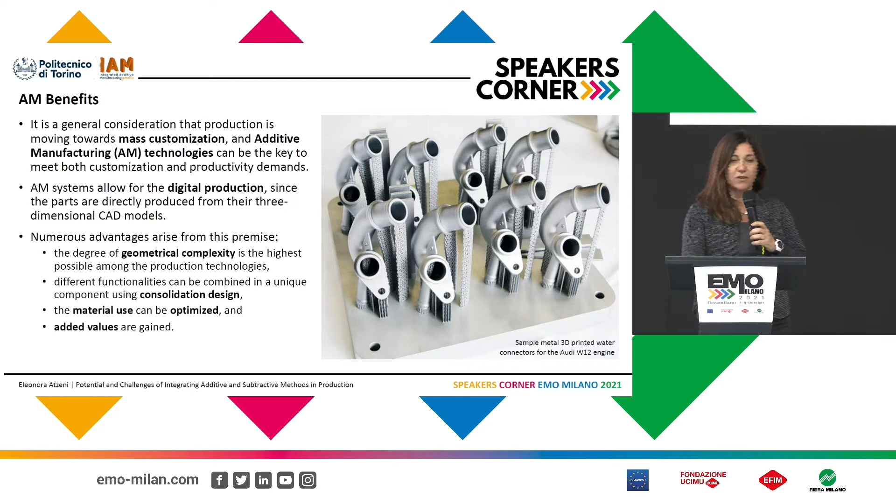So basically, additive manufacturing has gained a lot of attention by industries for the potentialities of these technologies. For instance, the possibility to create very complex parts. The possibility to increase the complexity means that we can optimize the part, reduce the weight of the component, and reach an added value on the component. That is also interesting from the economical point of view.

Additive manufacturing, as was introduced before, is a flexible technology, is a digital technology. So what you create as a three-dimensional model is produced by the machine. So we have the physical replica of your idea. And this is disruptive, and this meets the mass customization requirements, because you can change the model, you can change the part, you can build different parts on the same job. We can have a customization of components.

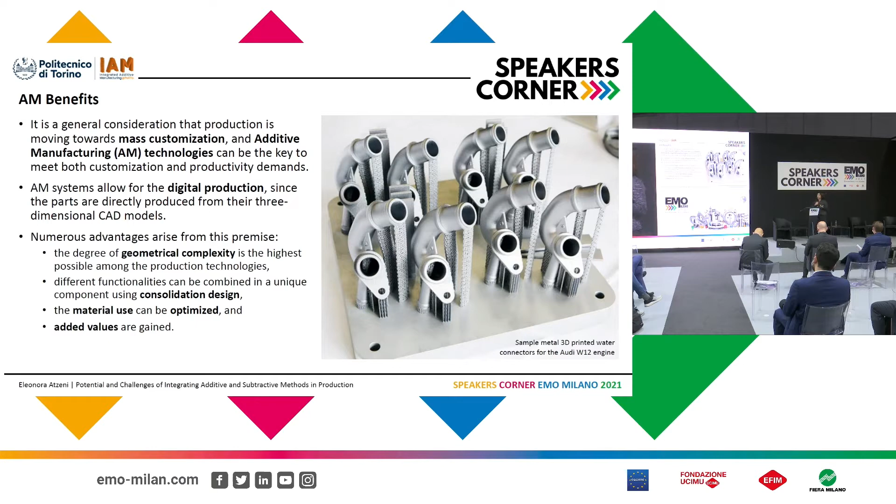We can have components with multiple functionalities in the same part, avoiding assembly of different parts. So this is the consolidation, the reduction of number of parts. And we have the added value. This is the most important characteristic of additive manufacturing components. But there are also some drawbacks.

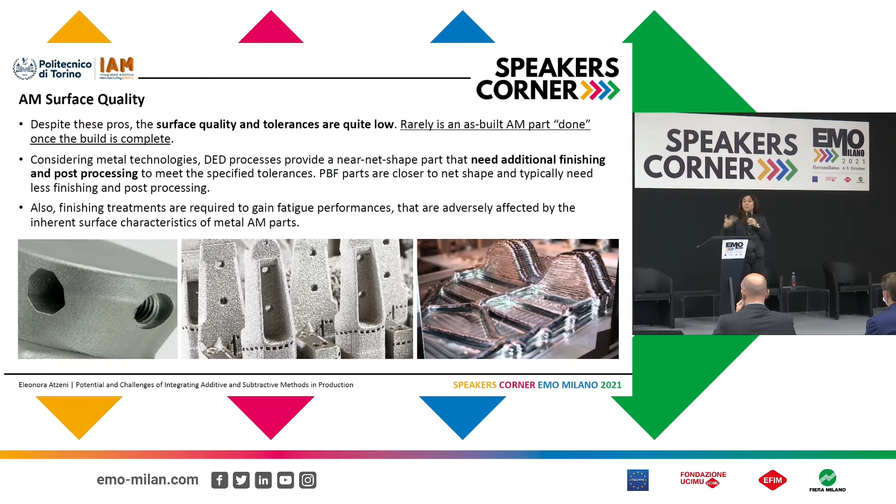And today we discuss basically the surface quality. Because when we want to combine subtractive, it is to remove material to obtain specific properties on the surface. The part is typically rough. The roughness is higher than conventional machining, especially. We can compare with casting. And the tolerances are larger than other subtractive methods.

So, to improve the aesthetic quality, tribology characteristics, or to have closer tolerances and better surface quality, we need to apply surface finishing treatments. In the picture, you can see three different metal components obtained from left to right: powder bed fusion, electron beam melting, and directed energy deposition. The differences are very evident.

Moreover, we must apply finishing processes if we want to improve the fatigue performance, because the surface roughness can be a problem. So what type of finishing technologies are available?

Basically, the same techniques used in conventional parts can be used in additive manufacturing. Considering metal parts, we can apply media blasting or shot peening to improve the quality of the surface and also obtain a compression state on the surface.

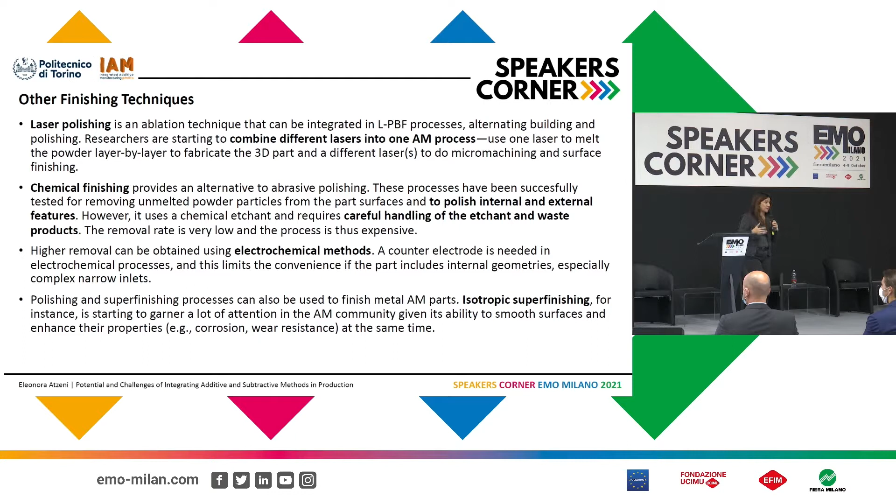That's another characteristic. But sandblasting, depending on the system, is basically performed manually by the operator. So we have a loss of uniformity in the surface treatment, and it takes a long time.

There are also mass finishing systems, mechanical, using abrasives in a tank, so the part is surrounded by these abrasives. This is faster, but again we have some problems accessing, especially internal surfaces and internal features.

For internal features, we can also use abrasive flow machining. We use a viscous liquid with abrasives inside to improve the surface of channels, for instance.

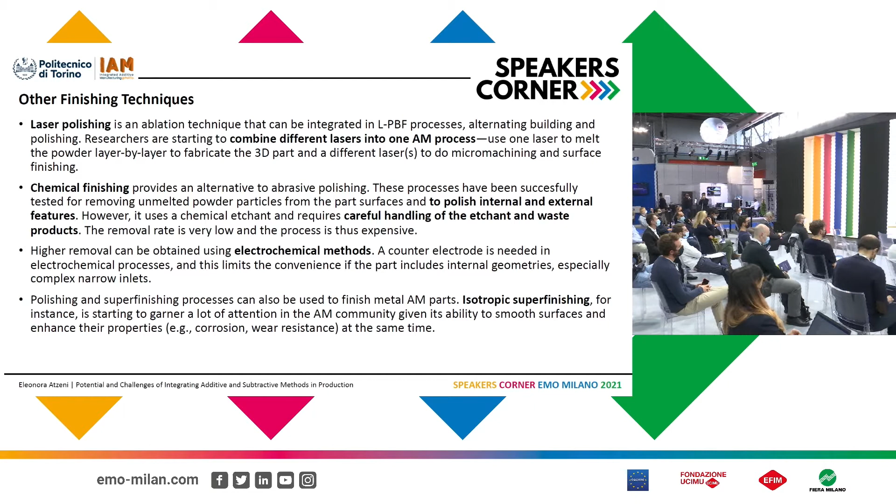Other methods are laser ablation, which is interesting for laser machines. We have a laser in the machine, and we can combine different lasers to perform building and polishing in the same machine. Some researchers are working on this topic.

And chemical finishing uses an etchant, so we have problems related to safety hazards and the sustainability of the process. Electrochemical finishing, again for internal features, uses an electrode, so there are accessibility problems. Isotropic super finishing for mass production is another interesting system.

By these technologies we can improve the aesthetic appearance and gain tribological functionality, but if we want precision, to meet close tolerances and the requirements of the design, we need subtractive methods—traditional subtractive machining.

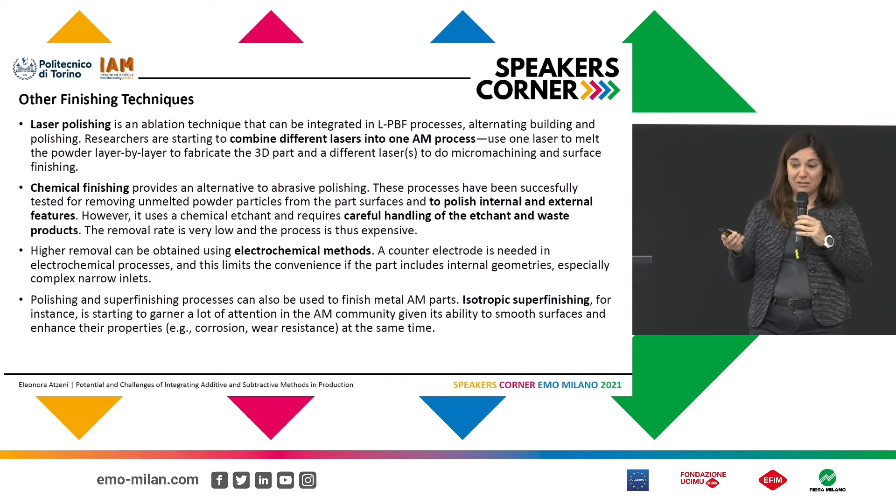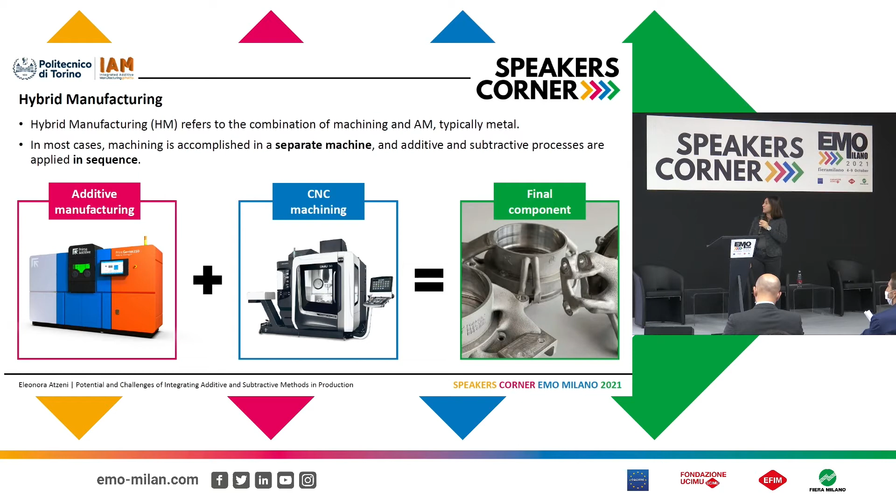In case of machining, we have different solutions. In general, when we talk about hybrid manufacturing, it's the combination of additive and subtractive to obtain strict part quality. One possibility is to perform the operations in sequence: first the production by additive manufacturing, then we move to another machine, a CNC machine, to perform the machining operations. Better to use a 5-axis machine, due to the complexity of the geometries.

But in this case, the same characteristics that make additive manufacturing attractive—the complexity of the part, the optimization, etc.—become a problem when machining, because we have to hold and fix the part in the machine, needing reference surfaces and datum points. The problem is similar to what happens in casting: low stiffness, since we reduce the weight and the part is optimized for specific loads that differ from the loads applied by machining. Probably we also have difficulty reaching the surface with the tools.

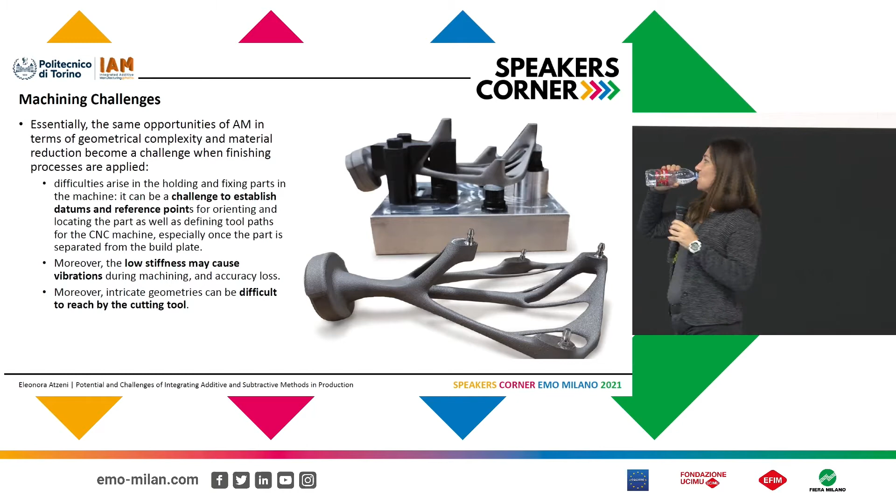So we also have the possibility to alternate. First, the simple geometry is produced by machining—this is cost effective. Then we add the additive part. The difference is very visible: the machined part is very smooth, the rough part is the feature added by additive manufacturing, and then probably we have to machine again to improve the surface.

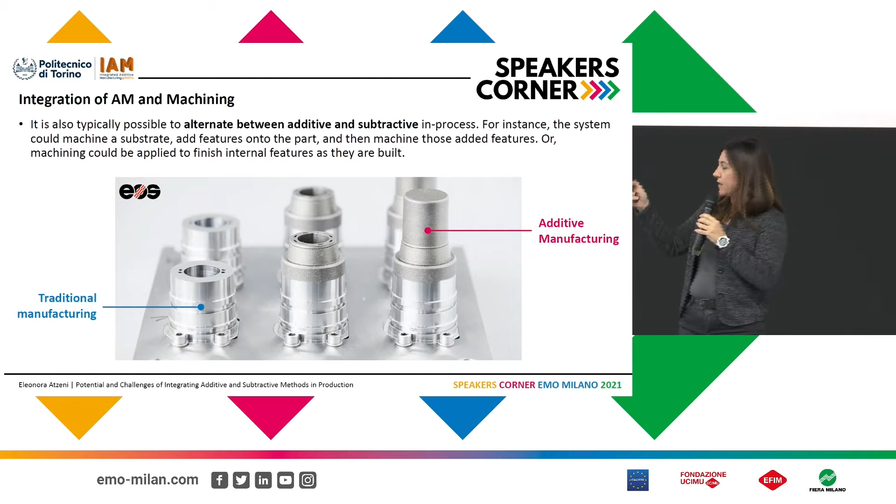So we can alternate, but most challenging is the combination of the two processes, additive and machining, in the same system. There are several commercial systems available, especially based on directed energy deposition. There are some solutions also for powder bed fusion, but it's quite more complex.

By that, we can add features to a substrate, an existing part, and without repositioning we can machine the same part and perform the surface finish. In this case, we can combine the advantages, because by additive manufacturing we can add to a substrate, we can repair a component—repairing is one of the most interesting applications.

We can also change the material, applying multi-graded material possibilities to improve the strength on the surface, or for thermal applications, apply a material with higher conductivity only where needed—reducing expenses, though it can be difficult to work with costly materials.

By machining in the same system, we avoid repositioning, and we increase the precision of the operations because there are no errors due to changing machines, transferring parts, or repositioning—avoiding alignment errors. There is also the possibility to machine the surfaces as they are built.

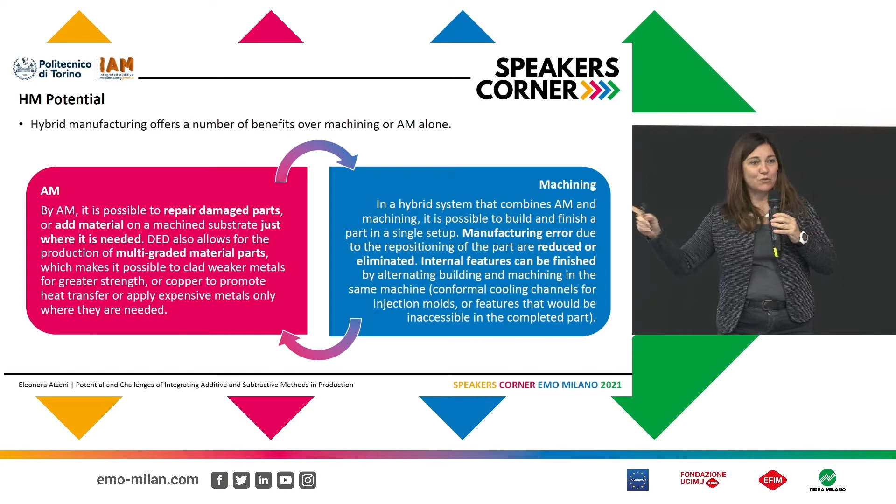So internal features are created, machined, and then we add other material—allowing us to access internal features that would otherwise be inaccessible at the end of the process. These are all benefits, but there are also many challenges with these processes: what is the best sequence of additive and subtractive steps? We have to decide.

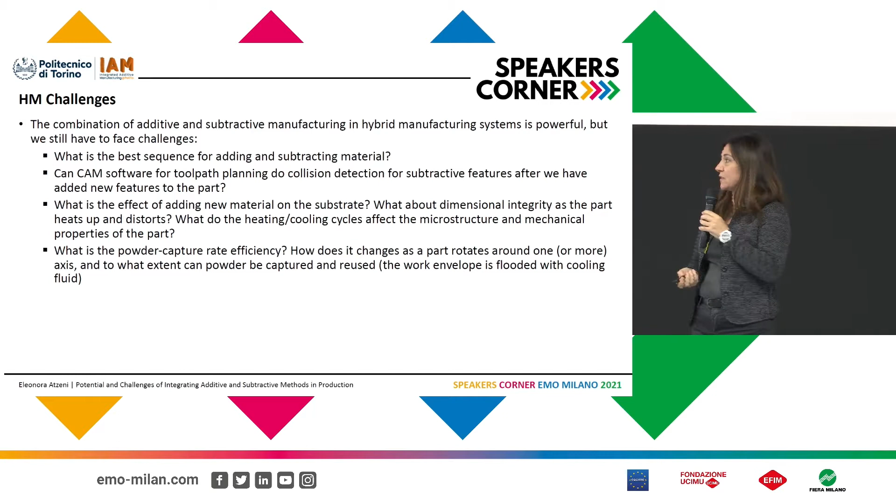How to define the toolpath using computer-aided manufacturing software, because when we add material, we could have a collision, so the software has to consider this aspect too. And what is the effect on the substrate? Because there are thermal effects. We add material, we have heating, and it's possible to have deformation or changes in the microstructure. So this aspect should also be considered.

And in the case of DED machining, if you use lubricants in machining, we have the problem of reusing the powder. So what is the powder capture rate? This should also be considered. These are challenges that have to be faced in future research to make the process more efficient for industrial production. So I'll conclude with this: very interesting promise, but we have just barely begun to exploit its capabilities. Thank you for your attention.

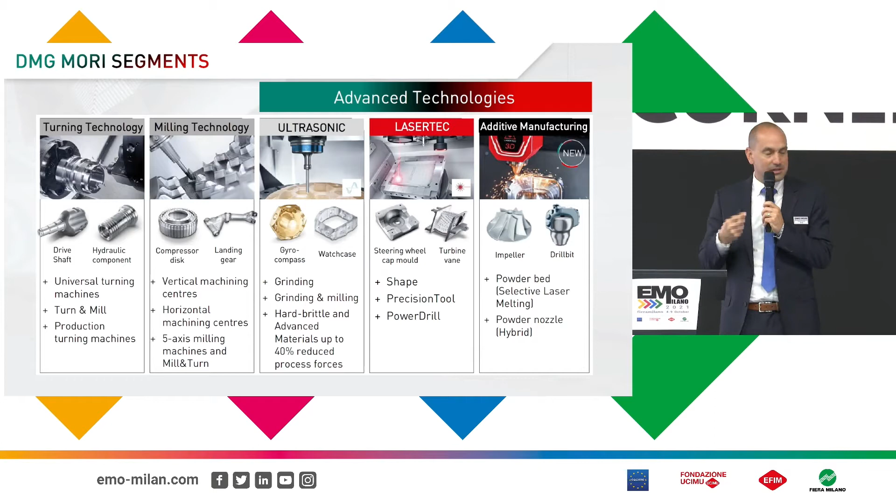So I don't think I have to talk too much about DMG Mori. You're all well aware, number one in the world when it comes to machine tools, different locations all over the place. And in addition, we have not only machine tools. Advanced technologies is one of the nice parts of DMG Mori, because we benefit from all the know-how within the group when it comes to CNC machining. And you really nicely explained the problems when it comes to clamping and the forces during the CNC process. So this is something which is really an extreme benefit and one of our core businesses.

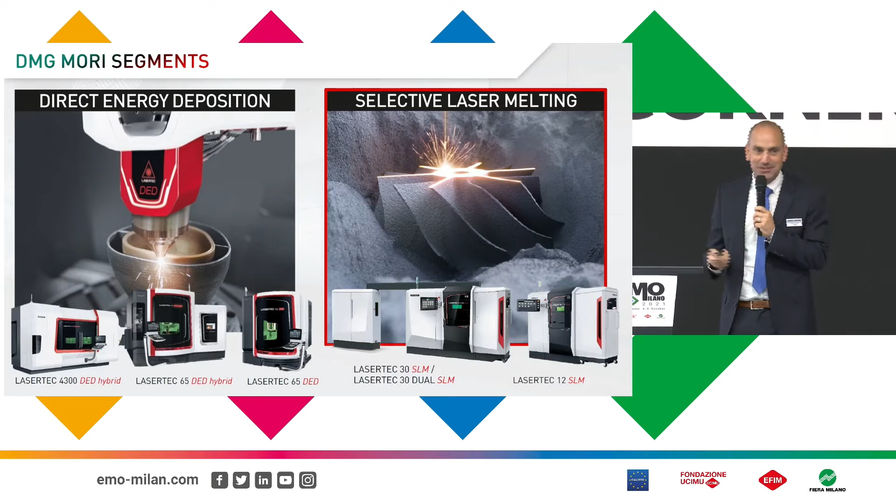Some of these pictures you have already seen, so again, not well aligned, but in the end we talk about the same topic, so you will see some pictures in some of our speeches. These are the parts you well know: nice, shiny, fancy, a lot of beneficial features integrated, and this is what you expect. And to a certain extent, it's also our fault that we show these parts all the time. So if you come to exhibitions, you will always see nice, shiny, sometimes finished machine parts. And this is the expectation of most of our customers.

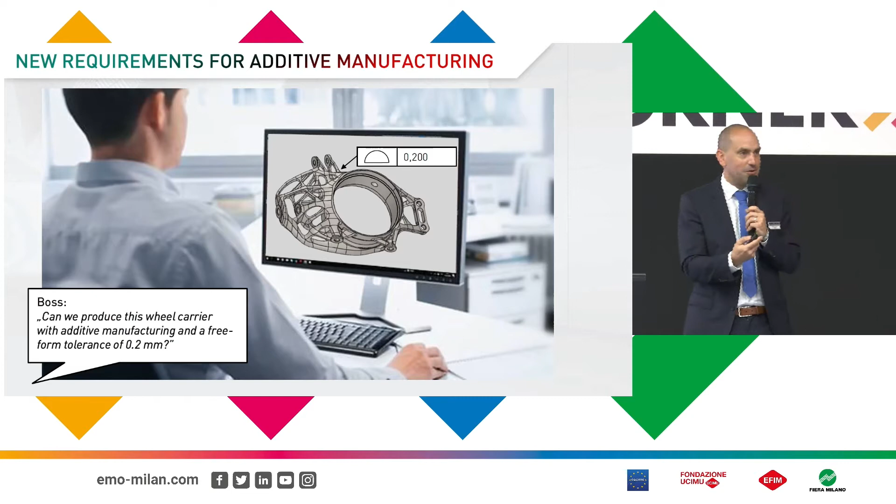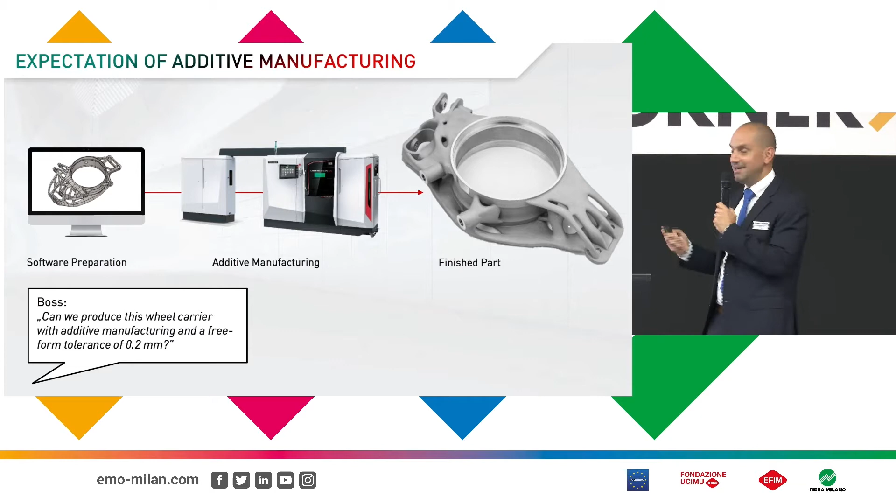I just want to give you a small insight about this internal discussion. Most people think, as I said, you just print it and you get your part right away - no headaches, no problems, nothing post-processing wise. But that's, sorry to say, not true. You have to think about how you get to your finished part.

People tell me all the time I just show the ugliest, nastiest parts at the exhibitions, and that's not to mess around with additive manufacturing. Don't get me wrong, as I said, it's an insane technology. But this is what you get out of a 3D printer, especially with metal.

You have your part there, welded down with support structure to your base plate. This is what you get - ugly surfaces, as explained, nothing nice. Especially my colleagues who come from CNC machining always say it's so insane, nasty, so ugly - no one wants to touch this part. For sure the benefits drive this technology - integration, lightweight, all the stuff, you heard it all up front - but then you end up with a part like this, and the problem starts.

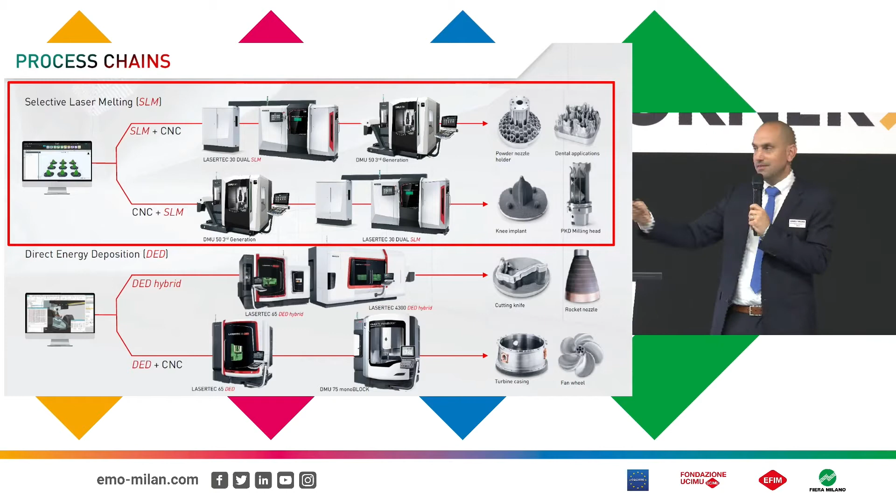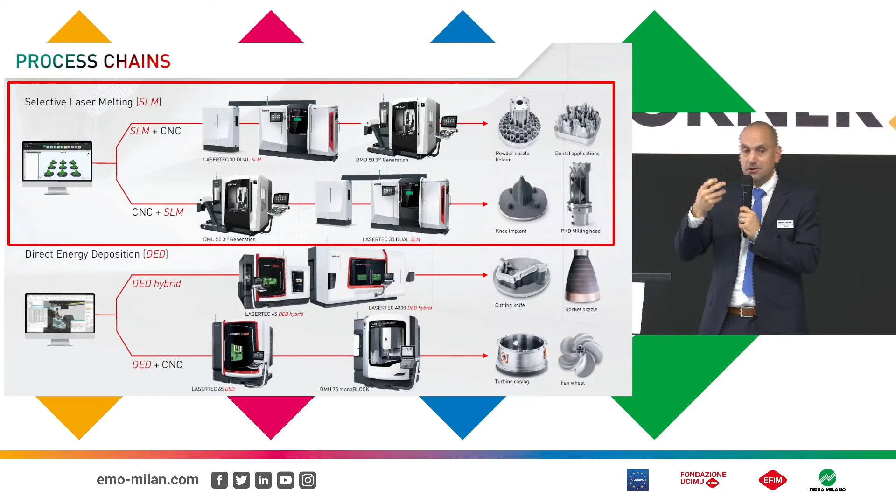So hybrid solutions, as I told you, is in our DNA, but the problem is how to set it up. Hybrid in our mindset doesn't mean it has to be in one machine. The process chain - there are a lot of different opportunities to set it up. Especially the one where we start with a machined part, where the part must not be that complex, and we add material additively where it has a benefit. This is, from our perspective, maybe the most beneficial process chain in the end.

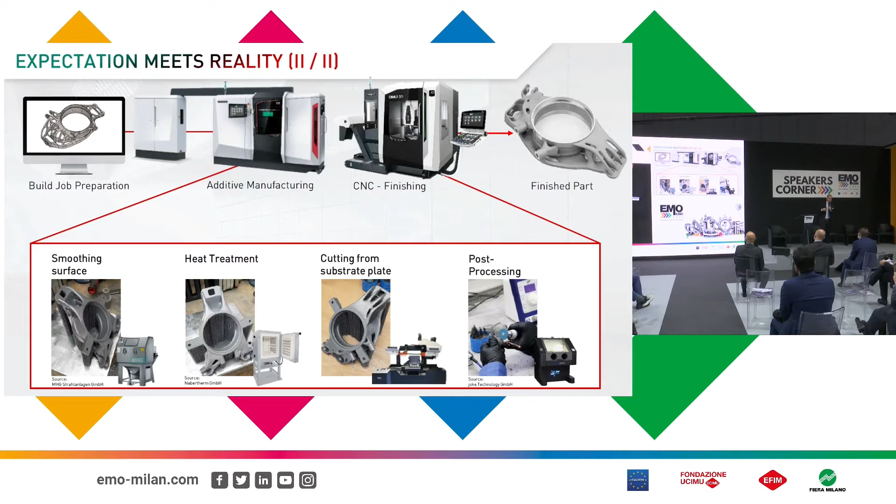But again, we set up the process chain - another 3D printer up front, additive - but in the end it's the same thing. This is what you have to keep in mind: surface smoothing, heat treatment, how to cut it from the base plate, how to post-process areas where you have no access with a machine tool, and then in the end how to clamp it and machine it on your CNC machine.

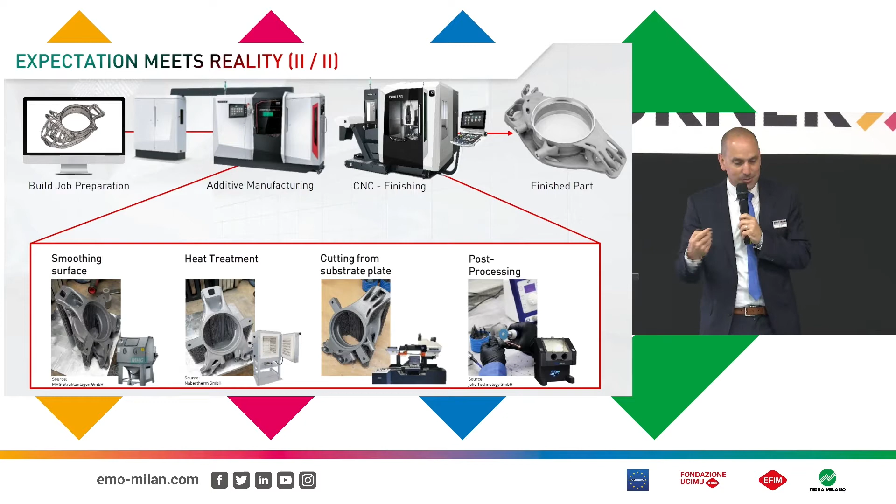So expectations meets reality, and this was also internally what happened within DMG Mori Additive. We set up this process chain, but in the end we forgot about distortion - it's a welding process. We are heroes in generating chips - you don't have to ask DMG Mori how to generate a chip, but how to weld something is a totally different approach.

For sure, as DMG Mori Additive, we have some ideas and background knowledge, but in the end it came down to the problem of how to optimize the part, maybe also for additive manufacturing, do some analysis if the part still meets the specs, design additional features, how to clamp this part. There's no chance to just print it as it is and then try to fix it somehow in a machine - you have to add material in addition.

And then we did a simulation. You start with your CAD model, no distortion, nothing at all, and then you simulate it. In the end you see the part is completely gone - you won't even find it in a CNC machine by touch probing it. It was really a nightmare.

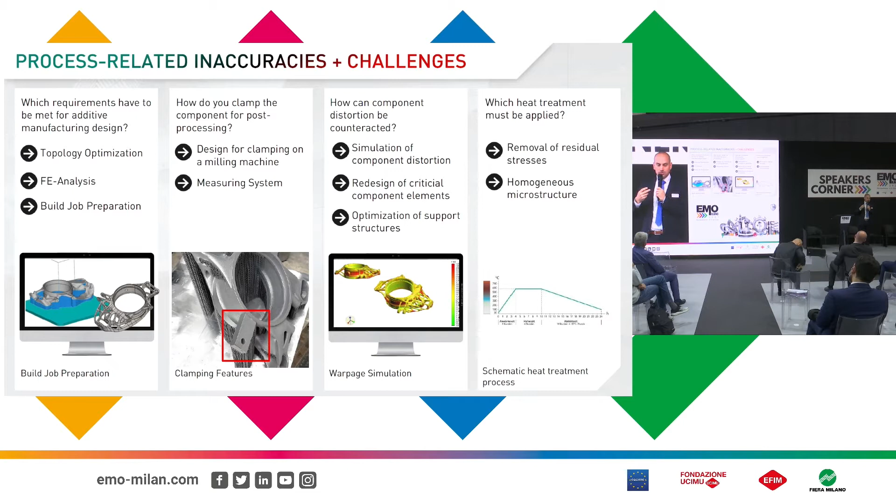So we had to do several calculations, pre-deform it, and in the end also support it differently after the pre-deformation. Set it up again, do the calculation back and forth. Within several loops, we ended up within the specs, being in this free-form tolerance of 0.2 millimeters. But then, how to freeze this geometry afterwards - if you just detach it after printing, it's already distorted again. So you have to make up your mind about heat treatment, and heat treatment processes also maybe specified to the needs of the part and the material.

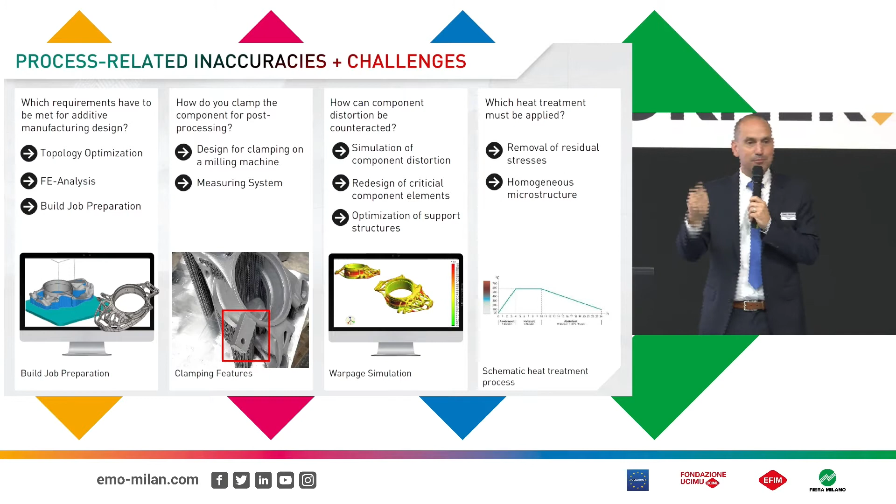So again, remember the question: can we produce the part within the specs? I don't know what kind of people you have in your company, but in the end this is something where you have to have a genius. This is the part we expect, nicely done, perfectly. You need this genius guy with know-how about build job preparation, all the process simulations, maybe microstructure analysis in addition as a material scientist, then he should know how to operate our 3D printer and also how to machine the part in the end. Just ask this one question to one guy within your company. You will need an expert group in the end to answer it.

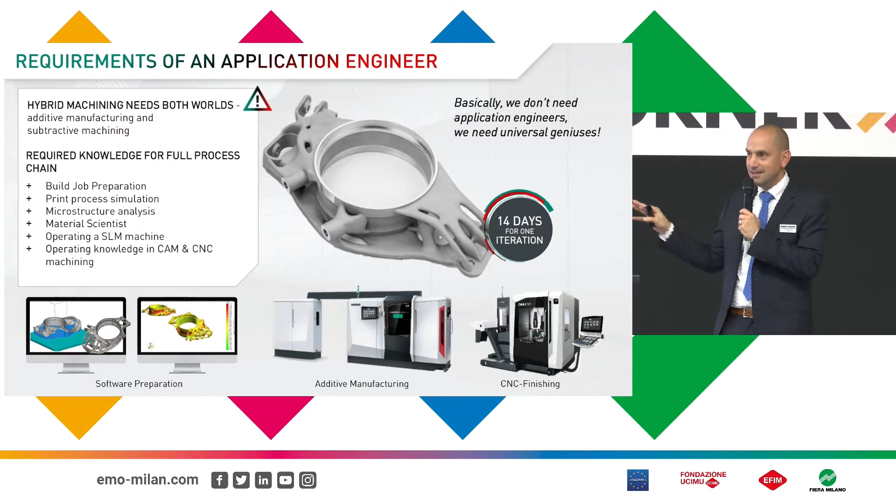So in the end, it took us 14 days. Everyone is thinking, okay, 3D printing is so fast, rapid prototyping and all this stuff. But if you really want a part which is not a bottle opener or a pencil, but something that can be used in industry, you have to make up your mind and set up all these processes and also, if possible, a seamless software platform for it. So in the end, as I said, the part is done.

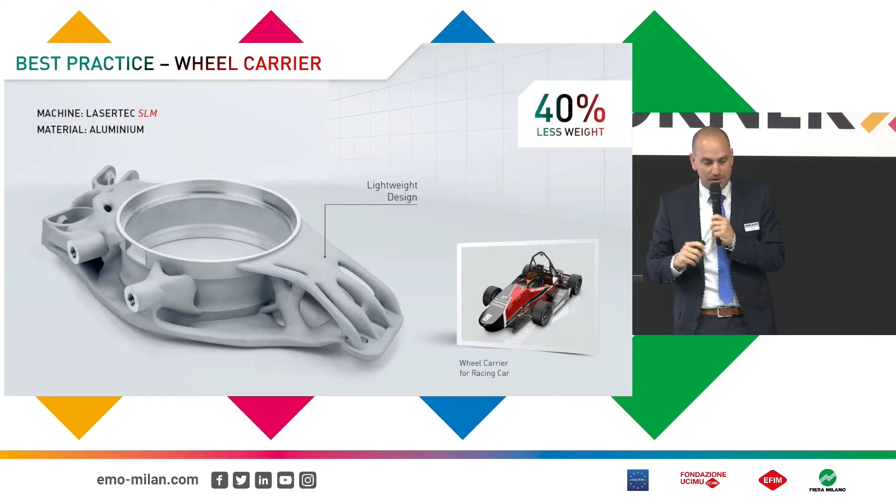A lot of things had to be removed manually. Some kind of artists, well known when it comes to dental applications, where you have these kinds of skills available. So in the end, you will always have a challenge to reach all the features and to machine it. But we succeeded, and you can see the nice finished areas and also where we removed the additional material for clamping.

I want to show you also another approach which we had internally. This was an internal task of our colleagues from Gildemeister Drehmaschinen GmbH. We set up our robot gripper head, and this is the approach how it should take place also in your companies: think in functions and not in restrictions. These guys set up this nice topology optimization up front where we had to have material and all these channels. For sure, we had to cover it to get rid of all these chips so they don't end up there. And we made it also a little bit stiffer.

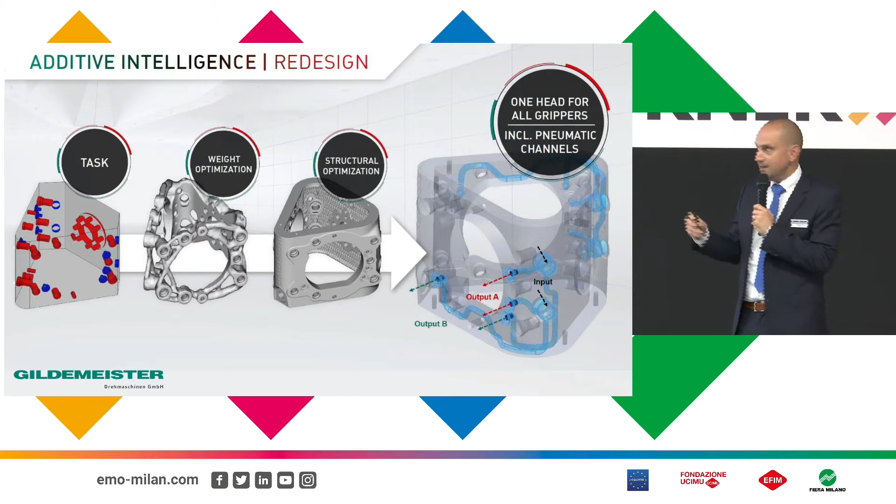This piece, as you can see here, came down from over 140 parts to 1 in the end. And the tolerances are 16 times better than assembling it piece by piece, with all these assembly issues and maybe tightness problems. So this was an eye-opener for our colleagues in the machine tool industry. We all think about race cars, aerospace and all this stuff, but there are so many applications in general engineering which have a need for additive manufacturing. If you set up your process chain in the right way and think in functions, not in restrictions, you will end up with these kinds of nice parts.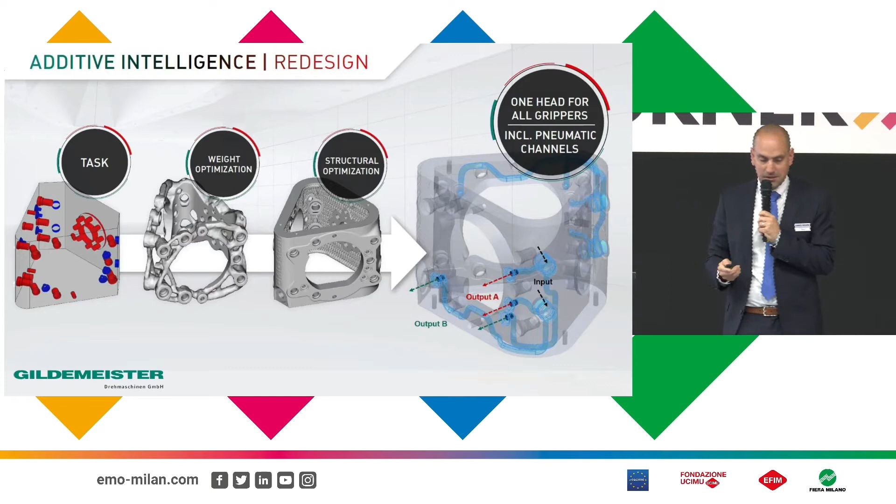For sure, in the end, if you ask DMG Mori, it always comes down to the question how to do it, how to set it up. So we printed 4 of them on a normal base plate, and then we tried to separate them somehow and bring them to a machine tool. This can work if you have easy geometries, but we are not DMG Mori if we don't have an answer to this. So we integrated a 0-point clamping system in our 3D printer, and that's the way to bring parts back and forth between the technologies to really end up in a hybrid process chain.

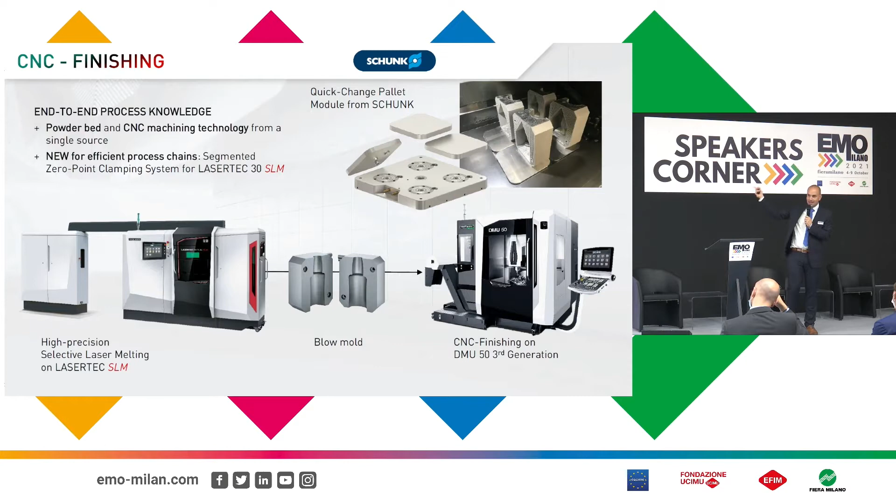And again, a funny story about this. You see the parts here are not positioned in the middle of the 0-point clamping areas. A CNC specialist directly knows why. We set it up in the middle, handed it over to our CNC machining expert, and he asked if we are really working in the same company. I was not aware, but the kinematics of the CNC machine also influence how to position the part. If we place it on one edge, as you can see here, it's way easier to access the areas without crashes or interference between the machine tool and the part itself.

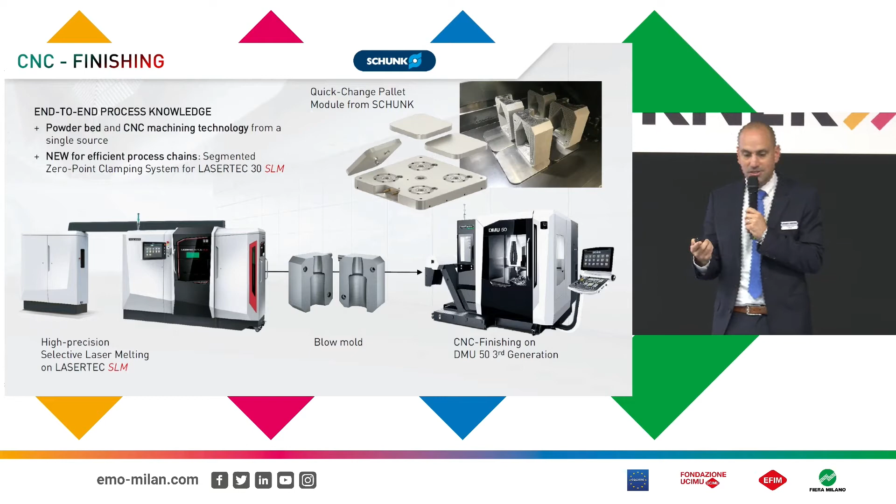So again, a lesson learned on our end: keep a CNC guy close to your additive expert to make sure you end up with a part which can also be machined on a CNC machine. With this 0-point clamping system, I think we have one of the key questions answered: how to bring it back and forth without a lot of tolerance issues or problems finding the parts. But again, this was also a lesson learned.

One example in the end, this is from the medical industry. Setting up a part, this one is in titanium, in the way that you just machine up front where you need the nice surfaces, tolerances and all this stuff, place it afterwards in the machine, and add material where it's needed. In this way, we could avoid all these nasty support structures and all this stuff, and showed additional benefits.

Because normally, I just want to stress it out again, you weld the same material of your part to your base plate. So a titanium part needs to be welded on a titanium base plate. And after that, you saw it away, but you have to machine the base plate. So it's a wear part. With this setup, we could do this base plate in stainless steel. And because the part itself is the base where we weld on top, there is no wear at the base plate. So thinking in process chains means taking care of a lot of different aspects.

And we have specialists within the group. We have seen this over several projects. Therefore, we set up a special team within DMG Mori called DMG Mori Additive Intelligence. And these guys will help you all the way down. If you face issues, as I explained in my speech right now, don't hesitate to come to us, ask, and we would try to set up the most beneficial process chain for you, no matter if it's SLM or DED in the end. We will find the right solution for your future production and the nice parts which we all expect in the near future.

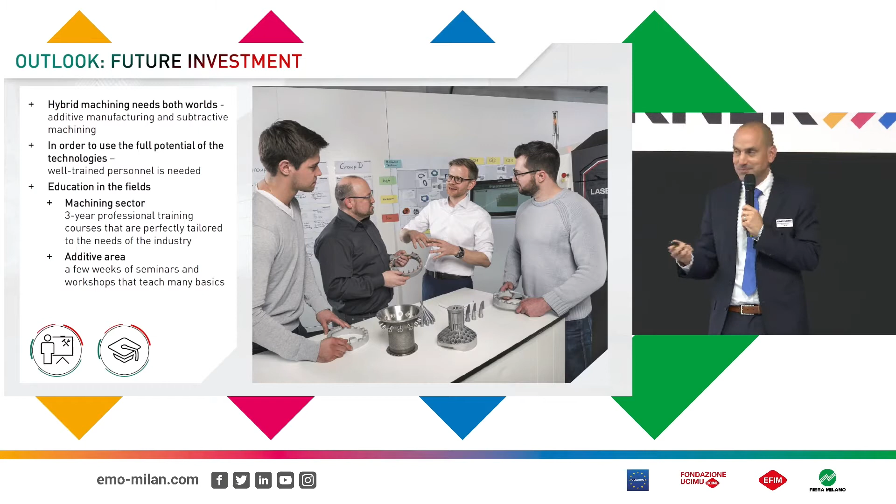Thank you very much for that. That was very, very interesting. I will ask you later, after that long process of understanding of the first example you made, if the next time it goes faster or not, but I will ask you in the panel.

So let's look a little more at the additive part of the hybrid technology equation. I'd like to call Paolo Calefati, Head of Additive Manufacturing and Innovation at Prima Industrie, for a presentation on mechatronics and photonics as key technologies for the development of laser machines for AM of metal components. Paolo, you have the mic.

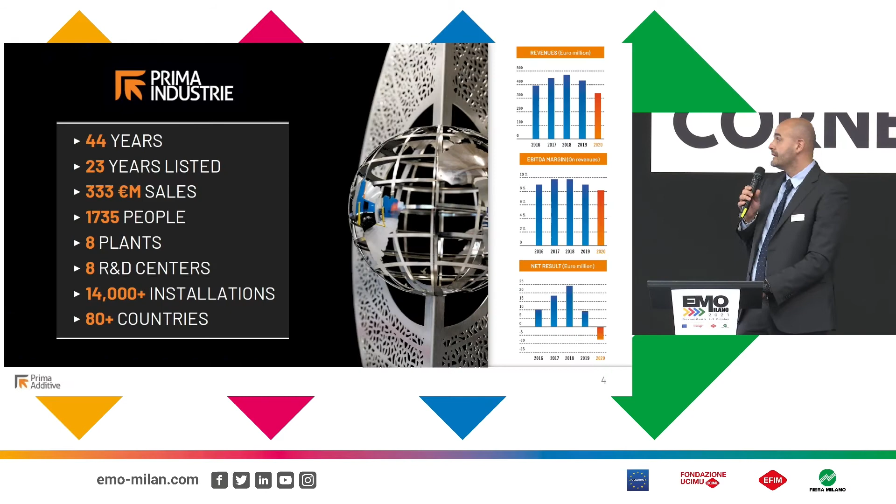As you can see, just to introduce briefly the division, Prima Additive is the newest and also the smallest division of Prima Industrie. You know that the other two divisions are Prima Power and Prima Electro. The first one is very focused on sheet metal working machinery, and the second one on laser sources and electronics. Prima Additive is the division that makes the additive manufacturing machines. Here a short story about Prima Industrie. As you can see, Prima Additive was just born in 2018.

Some numbers about Prima Industrie. I think you can see these numbers on the website, so we can go very fast. Then, our presence in the world: we are in more than 80 countries. Talking about additive, additive is a social trend at this moment. And talking about the trends that could be addressed to additive manufacturing technologies, I tried to recap some of these cases. Then I would like to speak more in general about each of these cases to let you know what we think about additive manufacturing and why additive could be profitable.

But there is, in my opinion, something that should be done for the additive technologies for the problem that Florian showed before, because it is not easy. So our focus is improving additive manufacturing machine maturation: to introduce new laser sources, to introduce new features of this machine that could improve the additive manufacturing process.

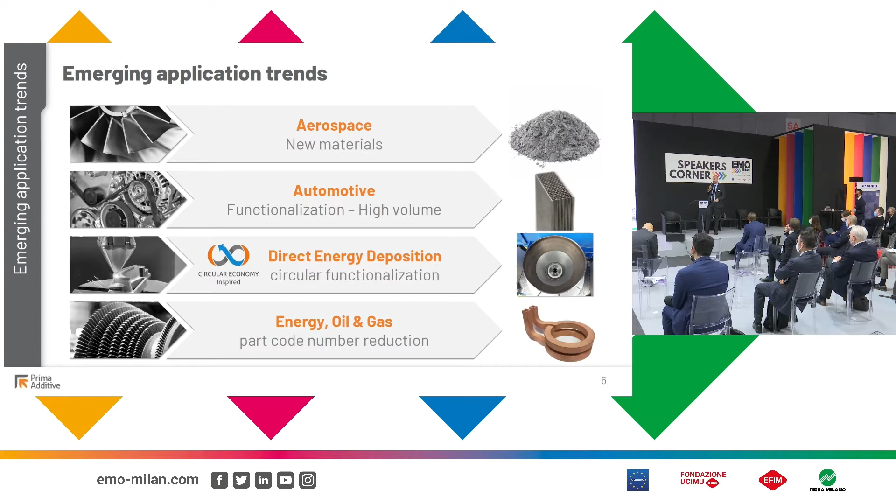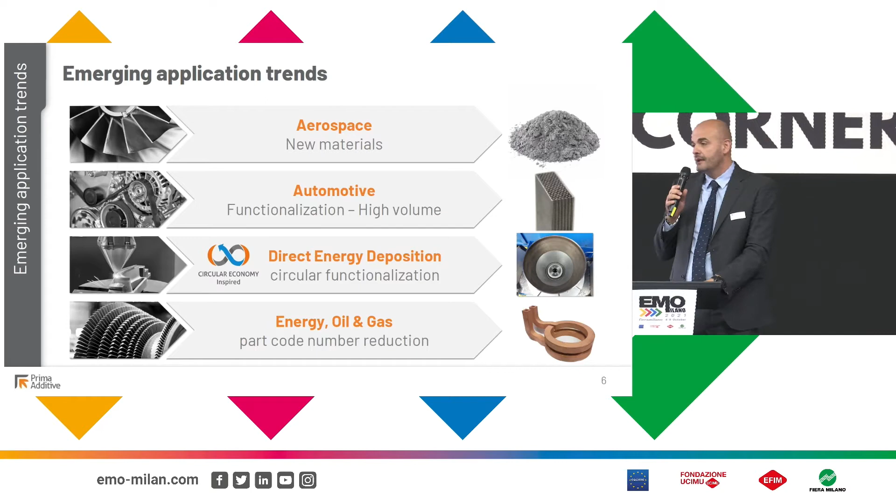It could solve certain problems like deformation, like material properties, and so on. So just talking about 4 sectors, we got experience in these 4 sectors in these 2 years of our activity in additive. And we will talk about new materials development, aerospace, automotive, talking about functionalization, and so high volume application. The direct energy deposition that we know very well as a technology, and then an application about circular, and some application for oil and gas.

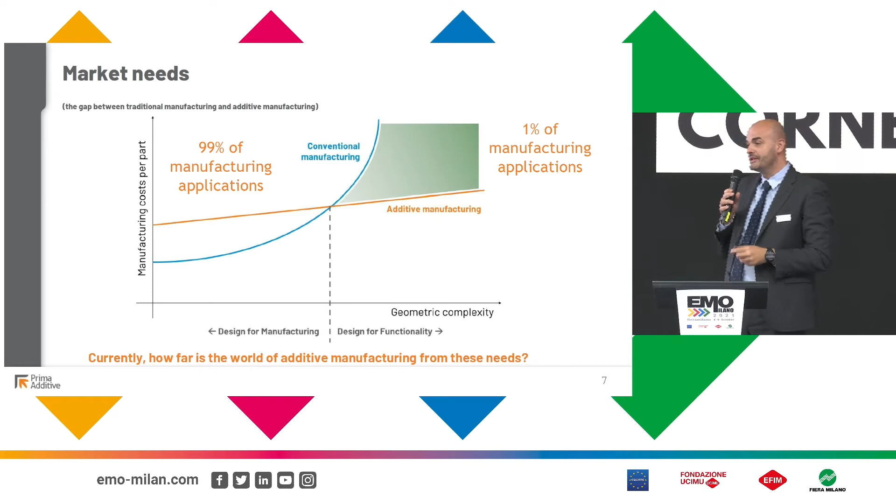It means that there is a break-even between geometries, functionalization, and cost, and volumes, and so on. And sometimes also hybrid technology born for this case, no? Because, okay, let's match additive technologies and milling, and all of us have the temptation to say, okay, a bit of milling, and then I can have the same components with the decreased cost, and so on. It's fine. It's a way to do that, no? But the point is that we have to improve the state of art of the additive machine. And this is our approach. And this is our added value in this market, to be honest.

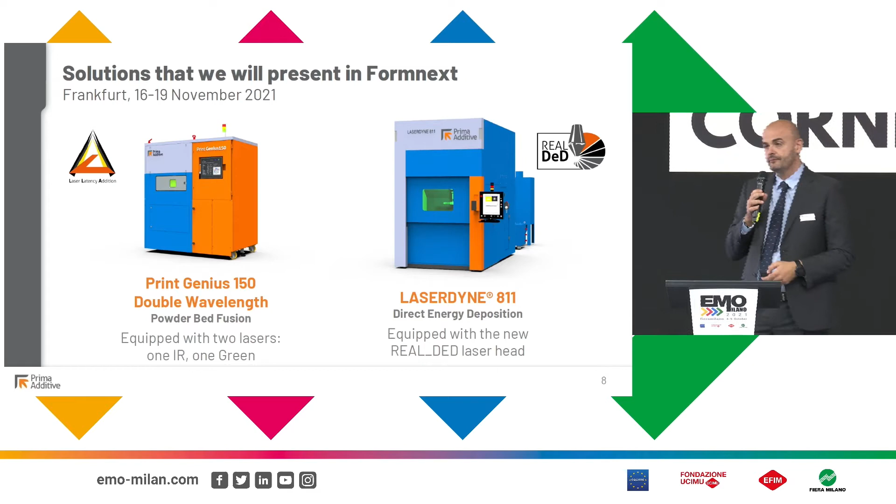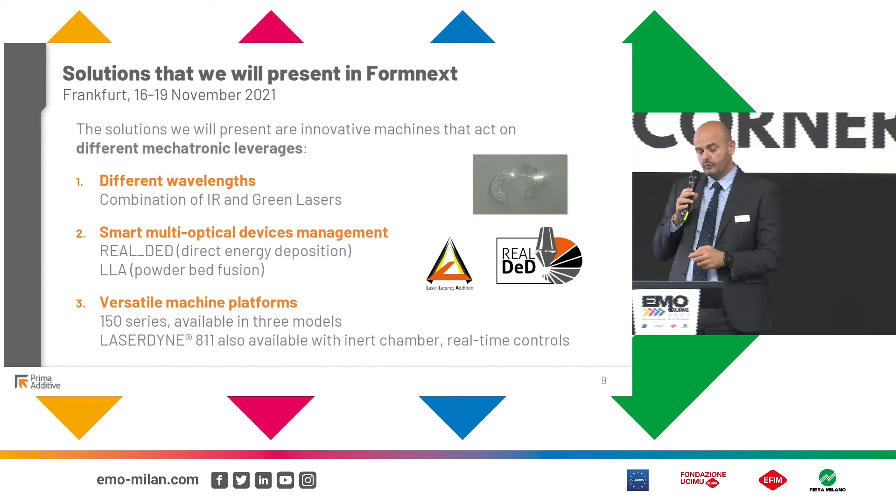So, okay, these are our 2 new technologies that we are going to introduce to next Formnext. We introduce new laser sources, different wavelength, also to work different materials, but also to improve the material properties. But also we improved the state of art of the optical devices in order to have some stress relief approach during the process, to have a different wavelength in order to use the right laser source for that kind of material. And also we developed some machine platform that is very flexible to be used.

Okay, this is our powder bed fusion family. We have 3 platforms, 150, 250, and 400. You can visit us. You can see 2 of our platforms in this exhibition. And we are going to introduce this machine that is very flexible. We are also hybrid in this case, because we are mixing infrared laser and green one. And then we can select the proper laser to work different material. We have a different monitoring system, and then we also improved the capability of the connection of this machine with the rest of the factory through the 5G interface and the real-time control of the machine.

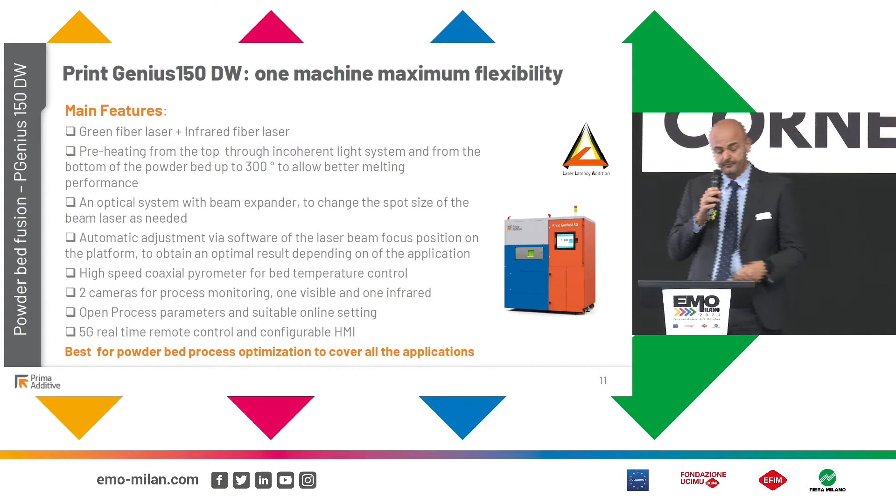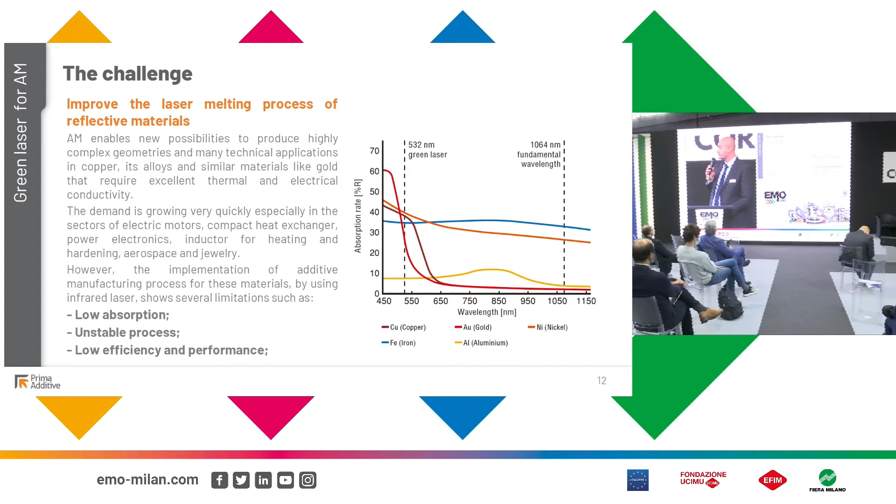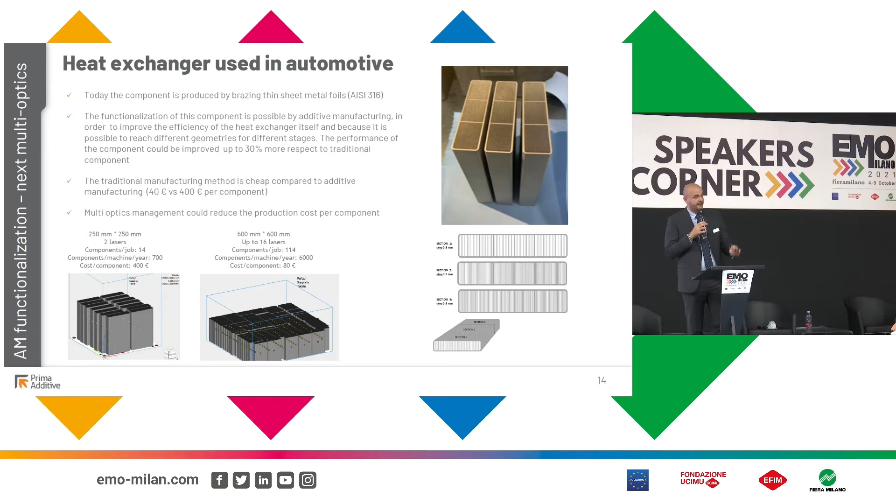You can see here a very typical business case in automotive, that is the heat exchanger. This exchanger has 3 different stages with 3 different geometries. It means that this component could be optimized, and the efficiency of the components could be improved up to 30% more. The problem of this component is the cost, also because the volume should be very high. Today, the desired cost for the automotive is 40 euro per component, but with the dual laser, we can produce it for 400 euro.

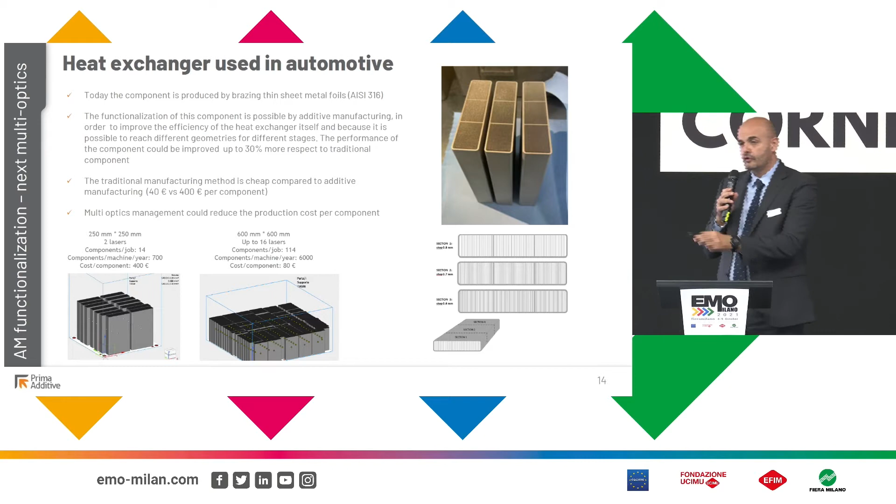So it's very expensive. Improving the number of lasers up to 16 with the platform 600 by 600 that we are going to have in the next 2 years, the idea is to reduce the cost down to 80 euro per component. It is something that is higher than 40 euro, but it is accepted because the component is functionalized. Then talking about the direct energy deposition, that is our technology that usually is matched with the milling.

We are going to introduce our Real DED. Real is an acronym. It means real-time adjustment of the beam during the direct energy deposition. It means that we have a very high dynamic beam shaping, and then we can adapt the beam size of the laser beam in real time. So we can be very precise, or we can be very productive.

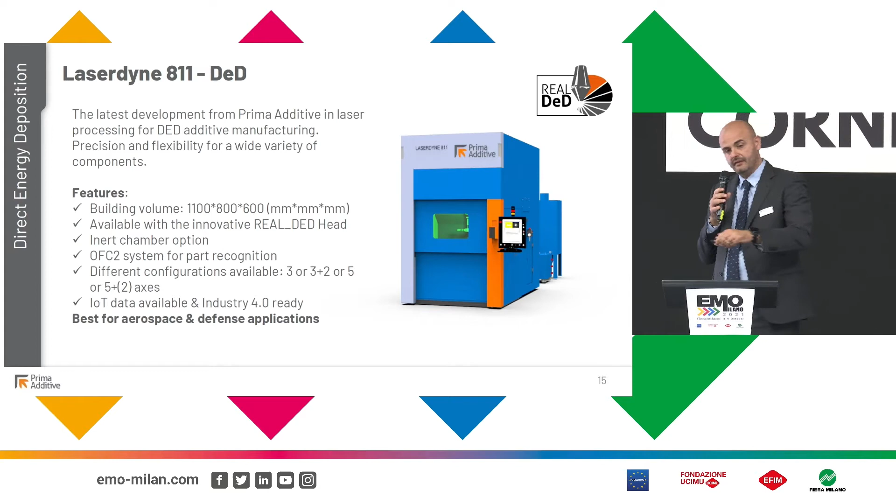But the point is that during this process, with this beam shaping, we are going to improve also the material properties, because we are making some stress relief during the process. Just an example here about this case. This is a tool for agriculture. Usually this tool is post-treated chemically, and the cost is 300 euro.

The standard DED process could produce this component for a cost of 600 euro, but we can improve the mechanical properties with the Real DED without any post-treatment, and we can be faster, and then we can have this component produced for a cost of 400 euro. And no chemical process, of course.

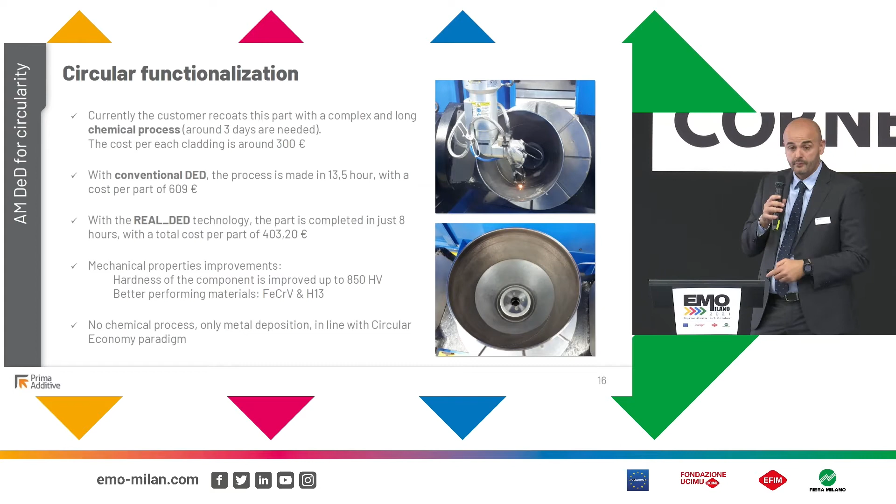So, just in conclusion, improving the additive manufacturing aspect, working on mechatronic leverages, and hybrid is one of them, we can reach a new target of AM. That is the profitability. And then we are opening two new areas. The area on the right is the gap that we are covering for the competitiveness of additive manufacturing. On the left, we will keep the delta cost for the products made in additive manufacturing, but the customer is available to pay it if these will be functionalized or they could be reused.

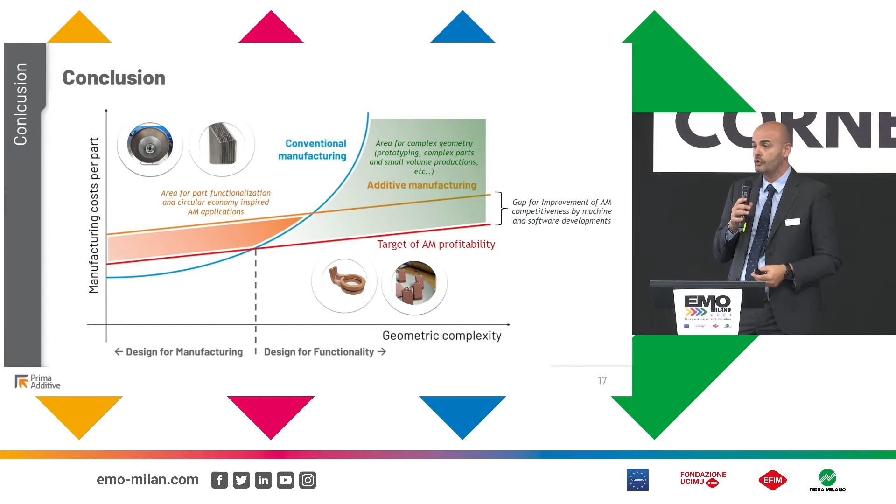So the most important part is let's work on the integration of the machine with the milling machine and the other processing. Let's work for the integration of additive in the traditional industrial context. But the most important part is that we should keep working on the improvement aspects of the additive manufacturing machine, because we have to solve the problem that Florian showed before. This is the point.

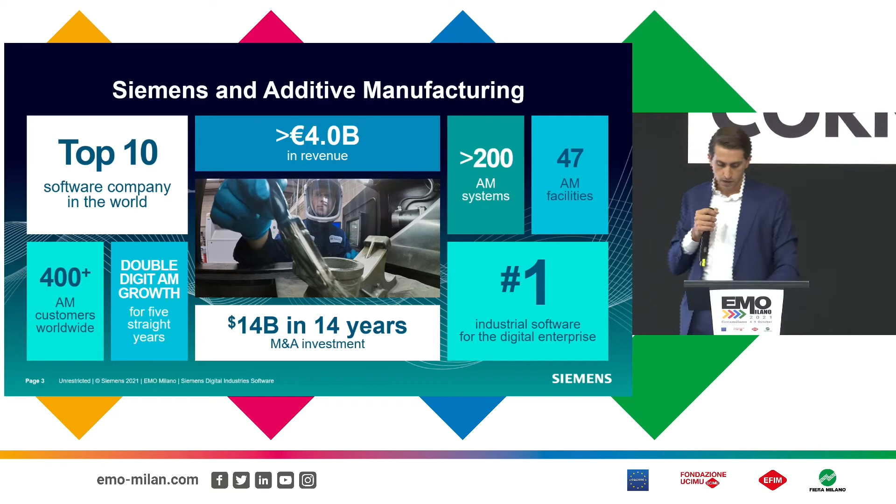And I'm saying all of this because this is one of the key differentiators of our software solution, because all the know-how we gathered from using the technology has been driving the development of our software, teaching us exactly what really matters in this technology software-wise. So our understanding right now is that one of the main barriers to industrialize additive manufacturing when it comes to software is an interrupted, fragmented workflow. What I mean is that most of the companies we talk to are using multiple software solutions and vertical software, and this software is not talking together.

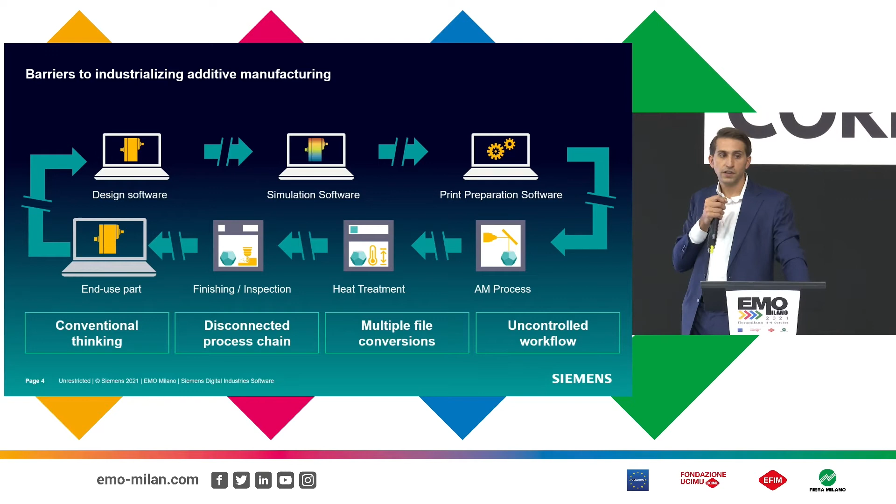And this means that for industries such as aerospace or medical, it's incredibly hard to trace the process and to certify it, because there is no way to manage data transfer every time you go from one software to the following one. And for all the sectors, for example automotive, in which certification sometimes is not key, in any case such a process is incredibly inefficient. It simply takes so much time to go from designing your component to printing it, only because you keep losing data and your data chain is disrupted. This is why, as Siemens, we try to solve this issue, allowing you to leverage what we call a holistic software solution.

And when I say so, I mean that we provide you just one software environment in which you will be able to find all the tools you need to go through all the additive workflow. And when I say so, I mean that you will be able to design your component, to optimize it. You will be able to simulate the performance of your component in such a way that it will be optimally designed.

You will be also able to manufacture your component, whether it is hybrid or other sort of technologies, and you also will have the chance to simulate your process from a thermal perspective, right? And finally, you'll have the chance to directly integrate with machines and manage all the quality issues. For companies and sectors, again, like aerospace and medical, this is key to being able to easily certify this sort of process.

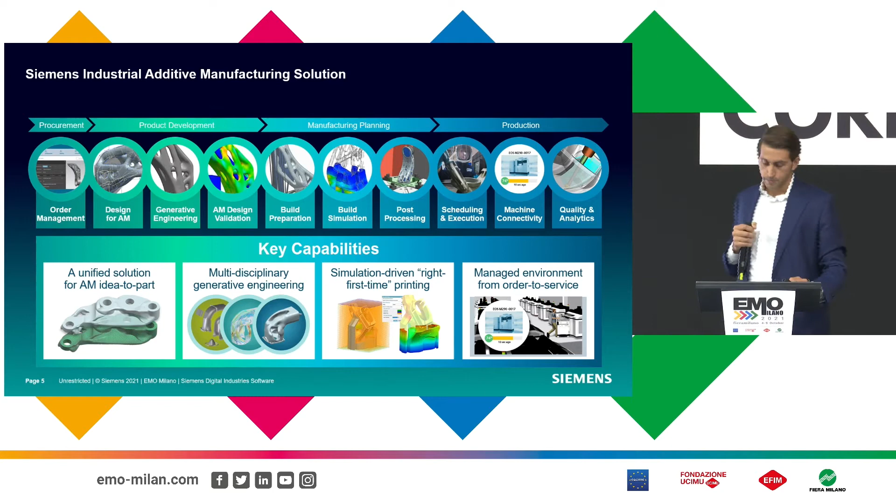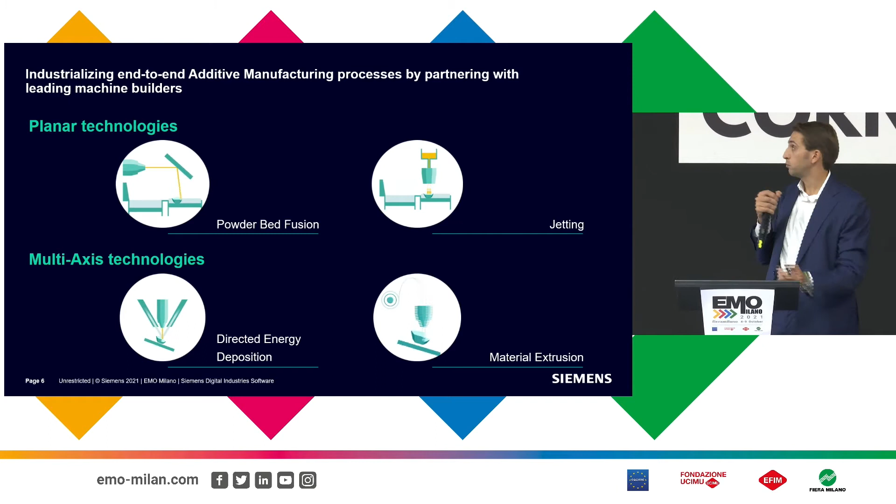So I've called it holistic. When I say so, I also mean that we are covering the main technologies, whether it is planar technologies such as powder bed or binder jetting, as well as multi-axis technologies. And this is going to be the focus for us today. But of course, we cannot do that all alone. Our strategy is to partner with the best machine tool builders in the market.

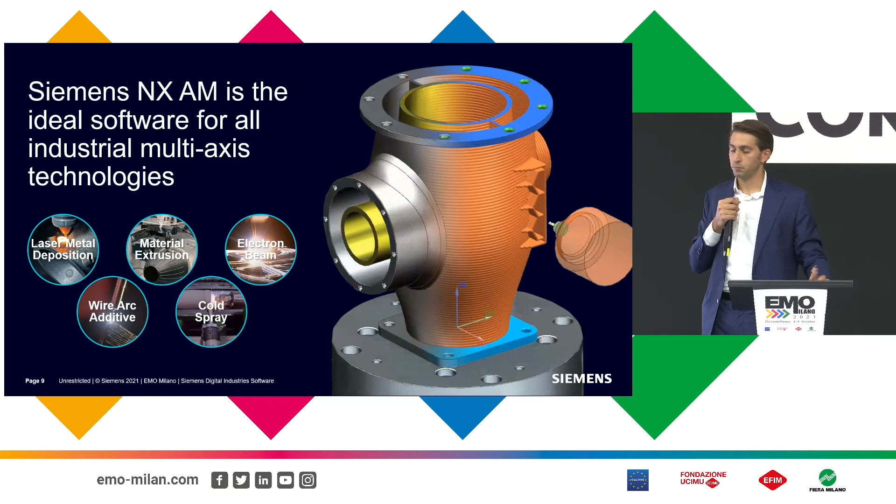So I said we have this very nice workflow, and what is exactly relevant for multi-axis deposition technology? Well, at first you want to design your hybrid part. Then probably you will want to understand whether this part is exactly manufacturable. And then after that, you can engineer all the manufacturing strategies, whether it is hybrid or it is just purely additive.

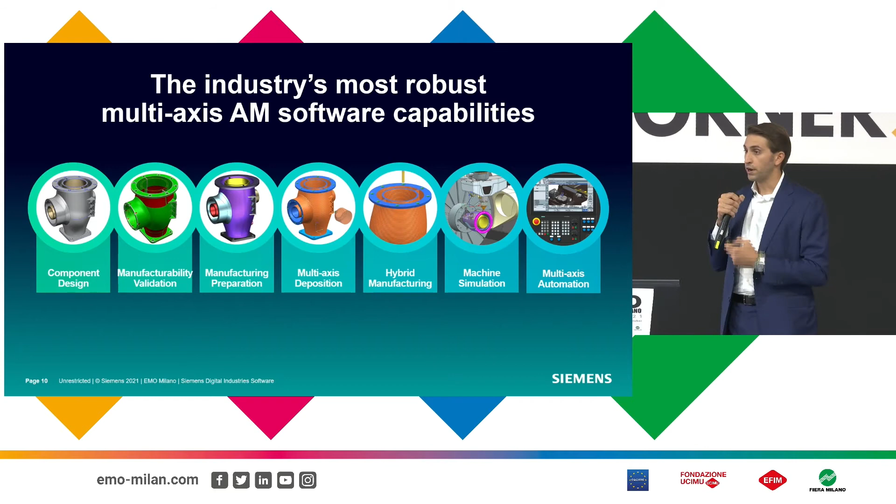And after that, you want to simulate your machine, whether we are talking about a kinematic simulation of your machine, trying to understand whether there are some issues related to, I don't know, out of reach or collision, but also the additive thermal process. And this is key in this case, trying to understand upfront if there will be any issue for your production. Finally, of course, you can integrate with your machines, and you can get your part.

So I'll try to talk a little bit about these topics process-wise, and the first topic is, of course, component design. So we provide one of the best-in-class CAD tools, Siemens NX. You can design your component, optimize it with the most advanced technology available on the market right now. We call it generative engineering or other sorts of optimization. What I want to stress here is how important and relevant it is having just one software solution between your design department and your manufacturing department.

And here I want to ask you a question. How many times did you have to redesign your components because there were some sort of issues downstream? How much time did you lose because you had to recreate all the manufacturing strategies simply because there was some issue from a design standpoint? Well, with our solution, this will be solved because all of the features would be easily updatable with a push of a button. And this is a great value for this kind of industries.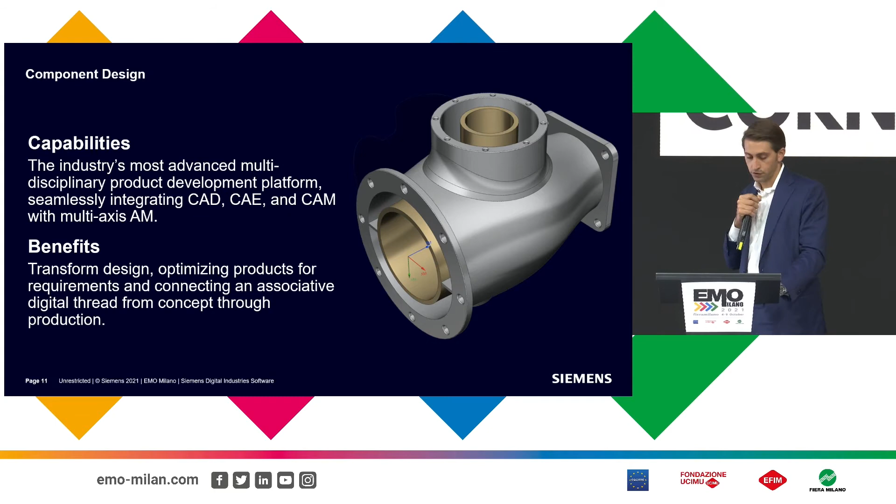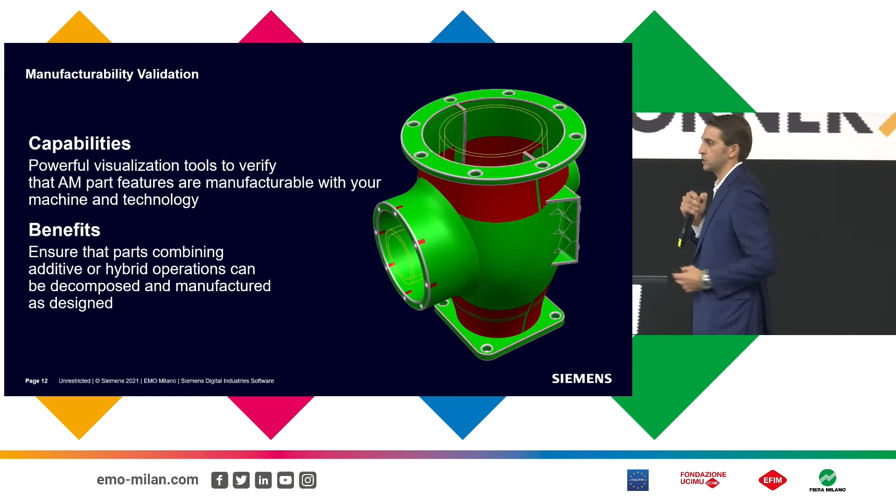But okay, let's deep dive in the following topic. Whether you design and manufacture your components, or you receive the geometries from your clients, at a certain point, you have to ask yourself, am I able to create this component with the technology I have in my shop floor? Well, we can help you to understand that.

We offer a series of tools for manufacturability validation, so you can understand whether your component is thick enough, whether it fits in your machine, or it has the correct overhang angles, and you can do that easily. And as you can see in the photo, you can color your components where you have some issues.

The next step when you have to develop your component is usually trying to prepare it for manufacturing. We call it decomposition phase.

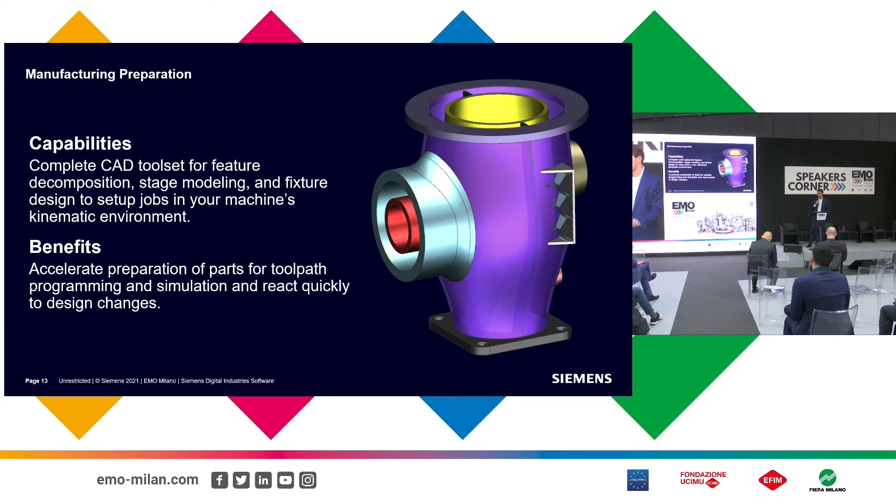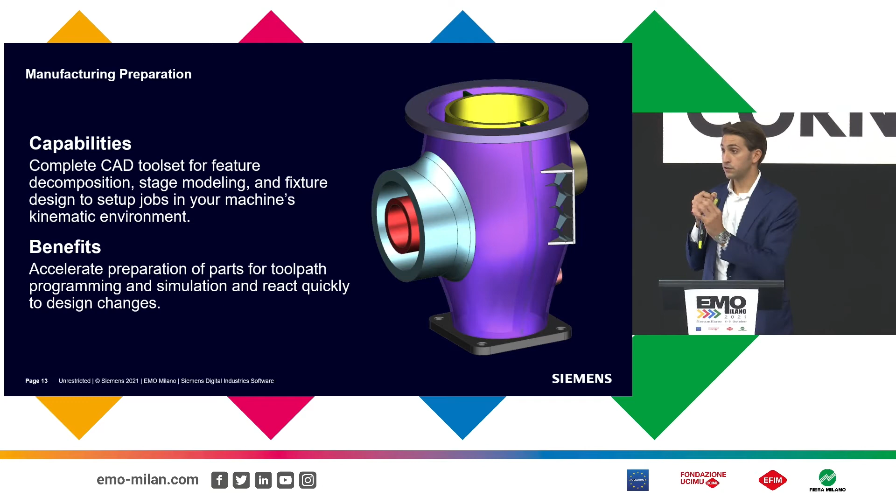So we are trying to split our object into different features, which can then be deposited. You can do that simply in our software with the powerful and flexible CAD tools you already have available. And this is usually also a good moment for fixing all those issues related to manufacturing.

You can add material here and there, or tweak the draft angle so you won't have any surface quality issues. Now, the next step is deposition. In our solution, you can leverage the best of our 3-axis and 5-axis operations. I'd like to stress the importance of 5-axis operation in depositing, whether we're talking about direct energy deposition, plastic deposition, or wire arc. 5-axis operations aren't only for creating complex shapes such as heat exchanger vanes or turbine blades, but they're really key to getting a nice superficial finish.

This is key in this technology, especially when it comes to finishing components. You're able to create more constant thickness walls, and when it comes to finishing, you'll have to remove less material. It takes less time, and you'll consume less tooling. So it's simply key to driving down cost. But you may wonder, what sort of operations can we do? What sort of geometry can we create?

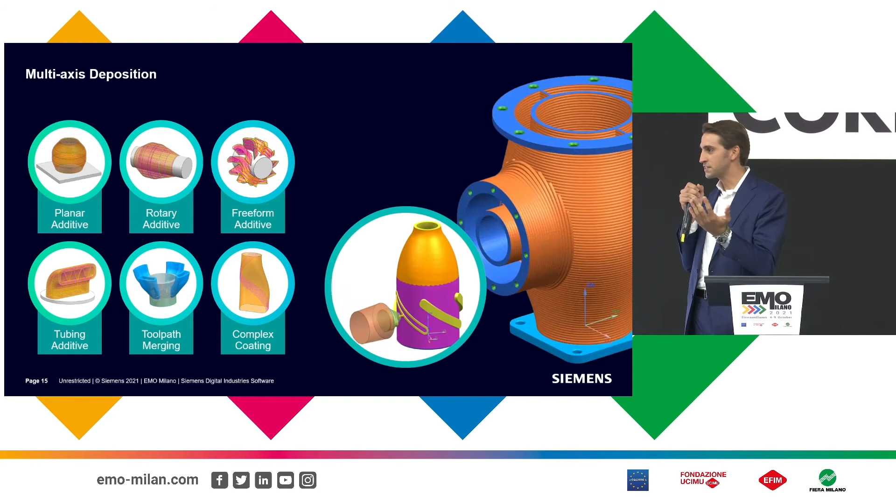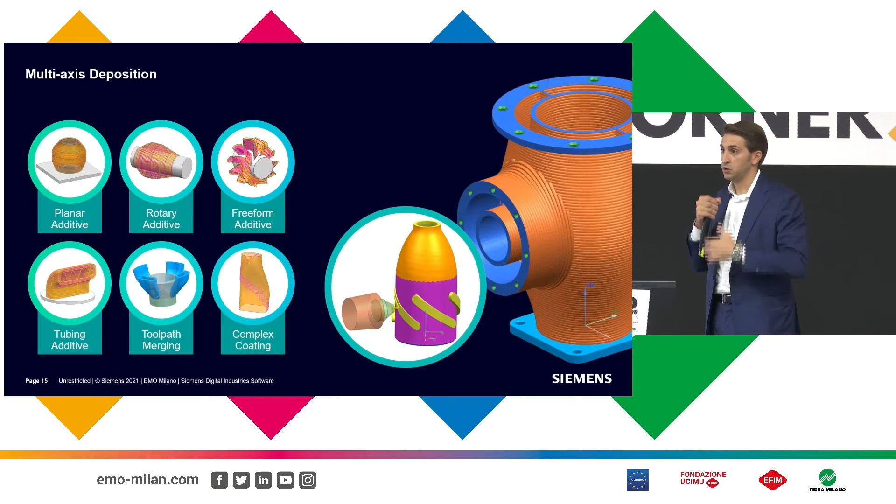We provide a great deal of flexibility in our solution. Whether you have to deposit a simple shape with slices parallel to each other, it doesn't matter if they're parallel to your build plane or at angles. Gravity does matter, but from a software standpoint you have this flexibility. You can deposit material on a cylinder or some revolute shape, basically coming up with an additive lathe, but you can also deposit material on a very complicated 3D shape with our additive freeform operation.

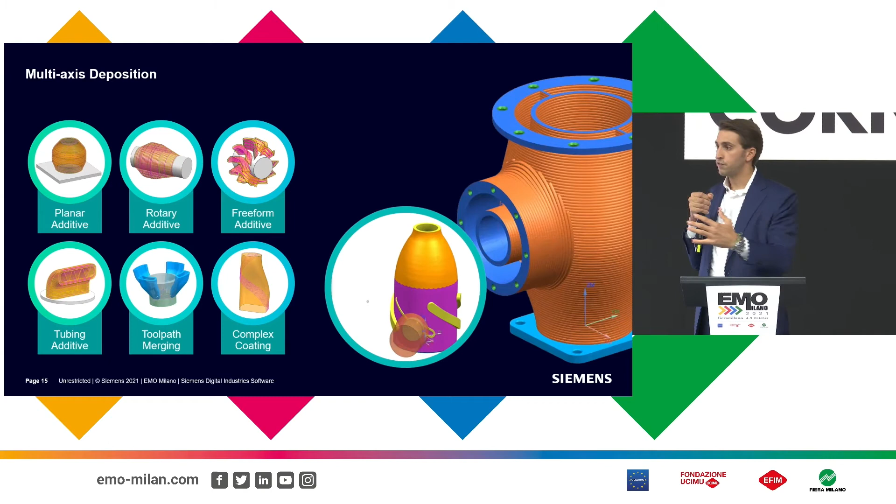Finally, we provide great support for all those coating operations which are so needed when it comes to repairing, as well as when you have to coat a certain surface with continuous fiber. So this is really helpful in this case.

Finally, we start to talk about hybrid. In our software, hybrid means that in the same environment, same software, same file, same graphic window, you'll be able to start adding material and introduce subtractive operations. This gives you a great deal of flexibility simply because you have a huge amount of possibility in terms of manufacturing strategies.

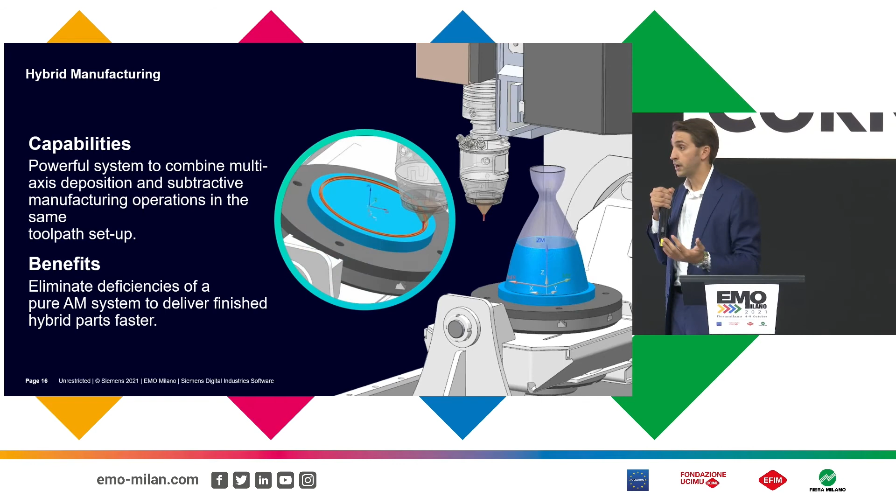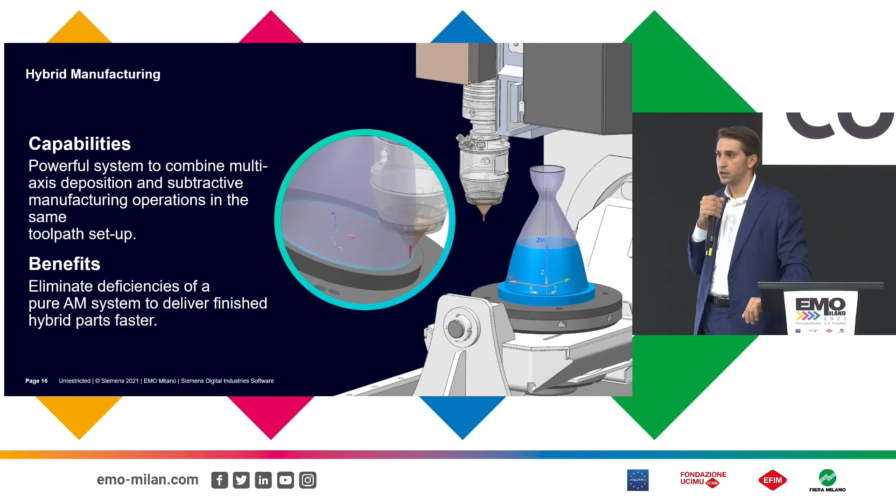You could go from a deposit-mill-deposit approach, where you deposit a bit of material and then finish that. This is great because you can forget about undercuts, since undercuts won't be there when you mill your components because they haven't been deposited yet. Or, usually very helpful if you have a hybrid machine with both deposition and milling functionalities. But if you have multiple machines, you could also go for a full deposition program, and then go directly to finish your components.

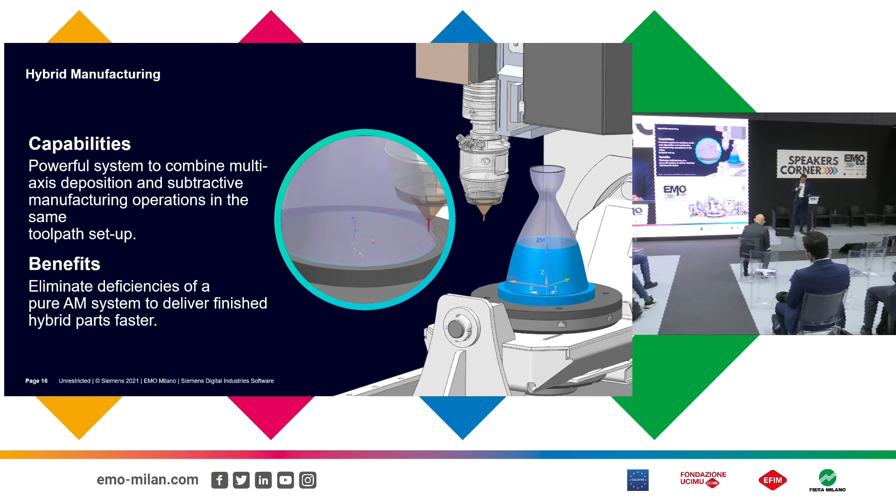Now we talk about simulation. When you've defined all your strategy, you'll wonder, can I do this? Does my part program have any issues? We not only provide the capability to simulate the kinematics of your machine so you can understand whether there are collisions, whether there's anything out of reach if we're talking about a robotic solution, or singularities.

But we also provide the ability to simulate the additive process. We have to remember that the additive process is a hot process, and there are a lot of issues that could happen while you're printing. There could be detachment from the build plate, warping, or wall collapse. This is something you'd like to know upfront so you can go towards a zero scrap rate.

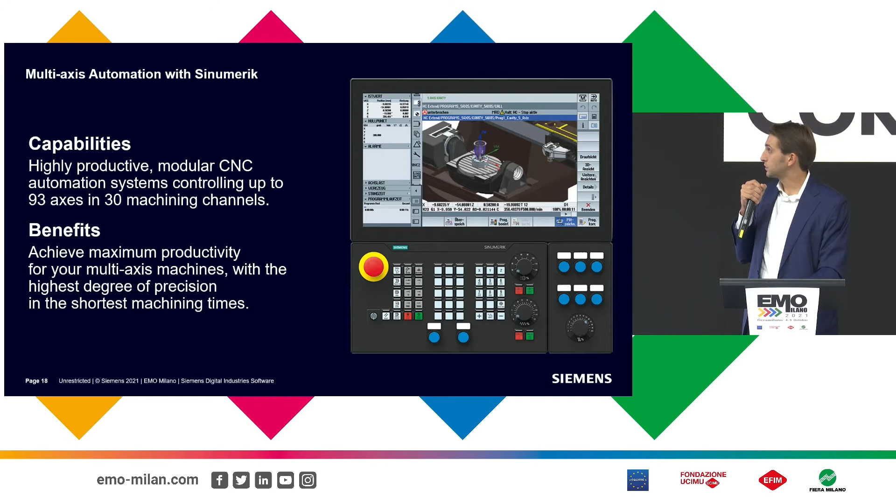Last but not least, we provide great automation. If you're interested in PLC or CNC, driving them with Siemens software allows you to reach great synergies between the two solutions. And this is also the finish - we are at the end of the process, with our component fully printed.

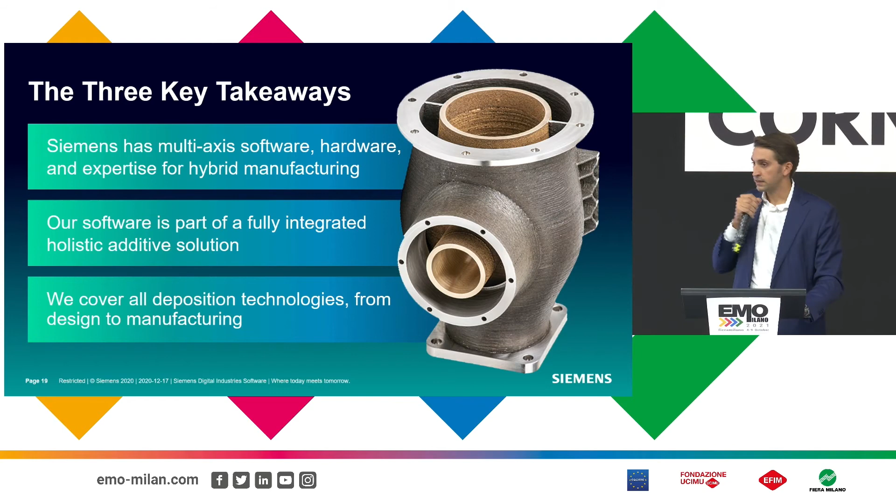This is also the finish of my presentation, and I'd like to leave you with 3 main takeaways. First, Siemens sells software and hardware, and has the experience to help customers and prospects in industrializing additive manufacturing. Second, our software is a holistic software which will help you cover not only one technology, but the entire workflow from design to manufacturing your components. That said, thank you very much for your attention, and have a nice EMO.

Thank you very much, and we are now at the end of our presentation. I would like to call the speakers on stage for our panel session, where we will have the opportunity to answer any questions you may have. We've seen a lot of products, a lot of hardware, a lot of technologies. So if you can come to the stage.